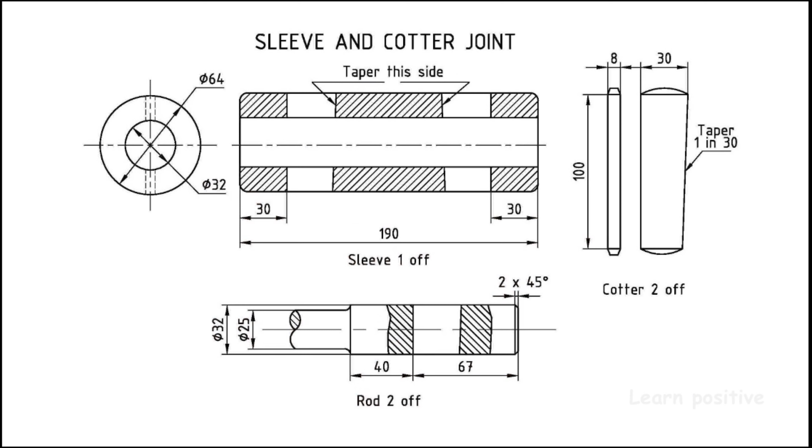Now I am going to show you how the question looks in 3D. The sleeve is shown in brown, and the rod in sandal color. We have to draw two rods, so I show two rods at the left and right, and also two cotters, shown in red at the bottom of the sleeve.

Now we are going to assemble the sleeve, rod and cotter. We insert the rods inside the diameter of the sleeve, and then we insert the cotter from the top and lock the rod so it does not exit from the sleeve. Now I am going to show you the 3D view of the sleeve and cotter assembly.

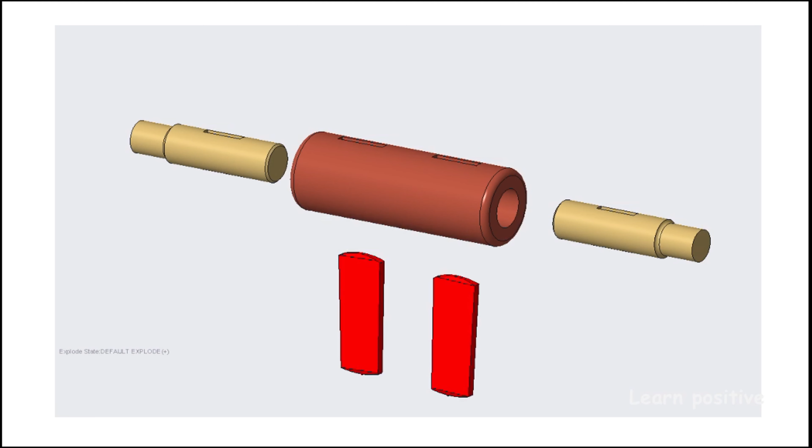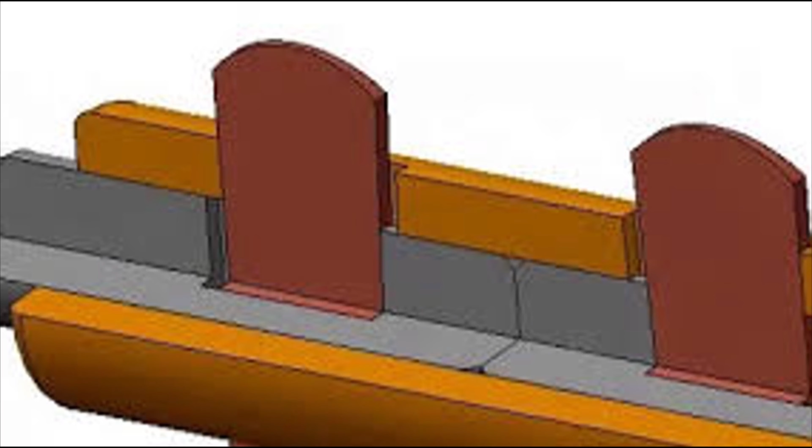In this we have the inside detail of the diagram. You can see the gap between the cotter and the sleeve at the right side, and the gap between the rod and the cotter on the left hand side. Between this zigzag position, the cotter is locked inside the sleeve.

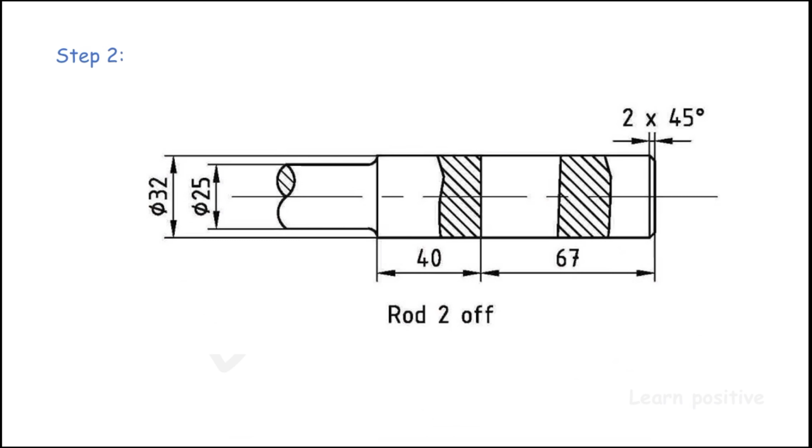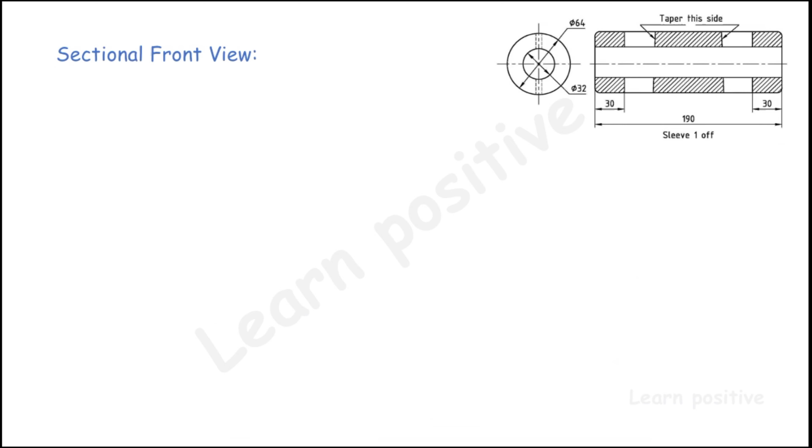Step 1, we have to draw the front view of the sleeve. Step 2, we have to draw the rod portion; we have to draw two rods. Step 3, we have to draw the cotter. I will show each step one by one, and I will also give the dimensioned question at the top of the page.

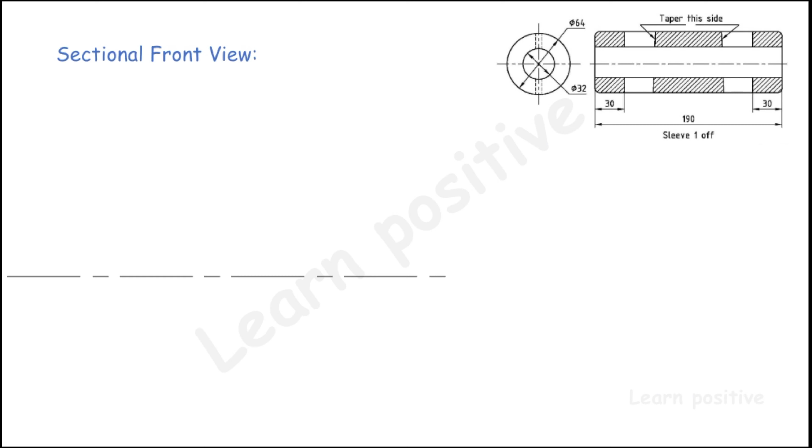So now see this diagram. We have to draw the sleeve. The dimensions of the sleeve are given in the diagram. First I have to draw the center line. One dash is long and another is short; that is the center line. If you draw dashes of the same length, it is the hidden line. Now I am going to draw the center line.

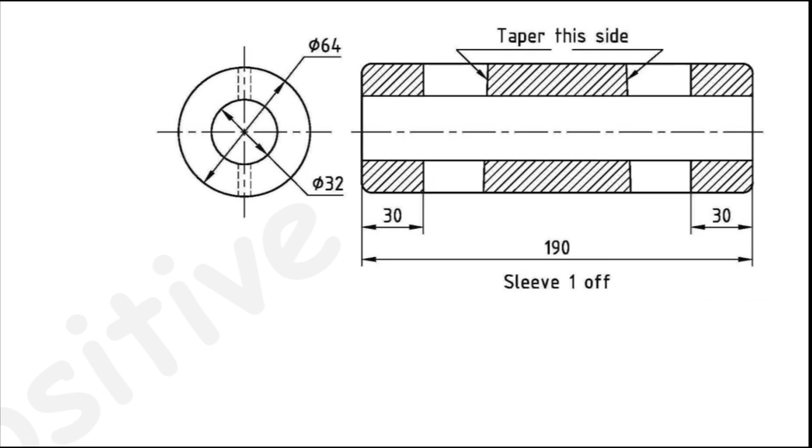Now see the dimensions. The overall length of the sleeve is 190 and the diameter is 64. I take half of the length to mark the sleeve. Half of 190 is 95. So I mark 95 from the center to the left and 95 to the right, and from the left I draw the 64 mm diameter, 32 at the top and 32 at the bottom. So I draw the 64.

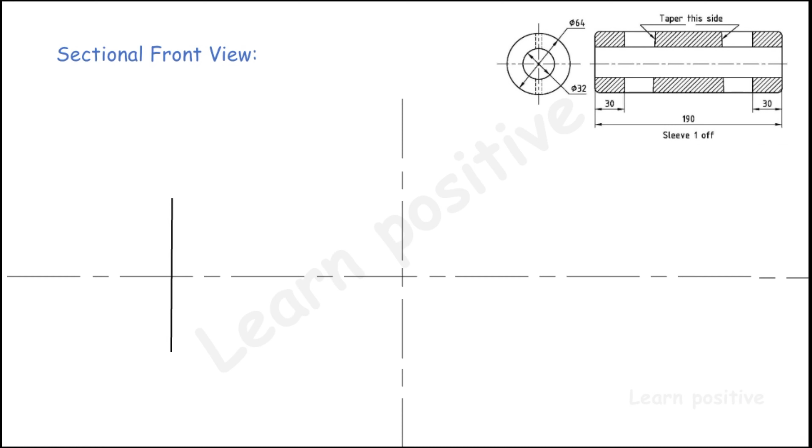Now I am going to draw the length of the sleeve. It is 190, and again the 64 mm diameter, and now I close the sleeve with the 190 mm length.

See, now we have completed the outer side of the sleeve. Now we are going to complete the inner side. So the inner diameter is 32 mm. So I have to mark the 32 mm at the center. So from the center, left hand side center, I mark half of the 32, that is 16 mm. 16 mm at the top and 16 mm at the bottom.

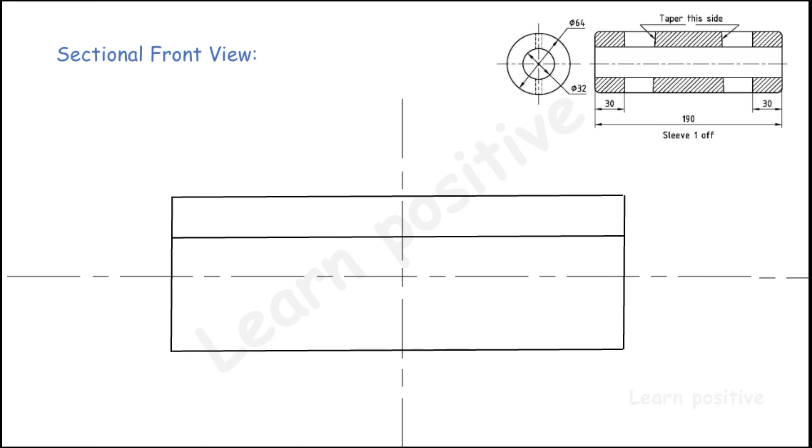Now from the right also I will mark the same 32, 16 mm, and now I am going to assemble the line. So the same way I have to draw the bottom line. So the 32 mm diameter is drawn.

After that I have to draw the cotter portion, the hole for the cotter portion. So from the left it was 30 mm, from the right it was 30 mm. So I have to mark from the left 30 mm and draw the line the same as below, and from the right to left it was 30 mm, same as below.

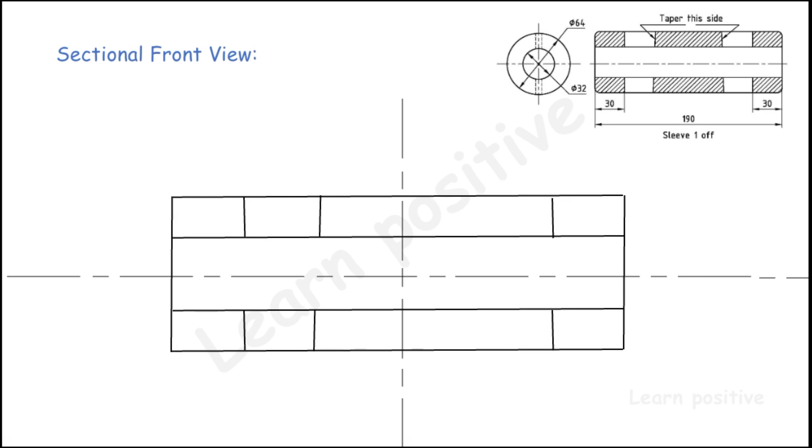And then now the thickness of the cotter is 30 mm. So I will mark 30 mm and at the bottom 30 mm. As I said, we will mirror the same at the right hand side. Now the first step is completed, and then the second step is to draw the rod. So the dimensions of the rod are given at the top, as we have shown.

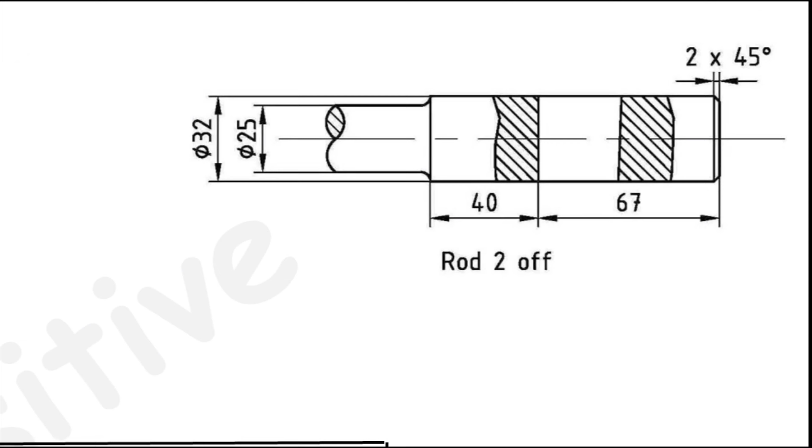Now I am going to draw the rod. First we have to start from the right hand side, so the taper side 2 mm. So from the center I have to give a gap up to 2 mm. So I will draw the 2 mm line, and then the length of the rod is 105 mm, and the bottom also I have drawn 105 mm, and I have closed the rod at 32 mm.

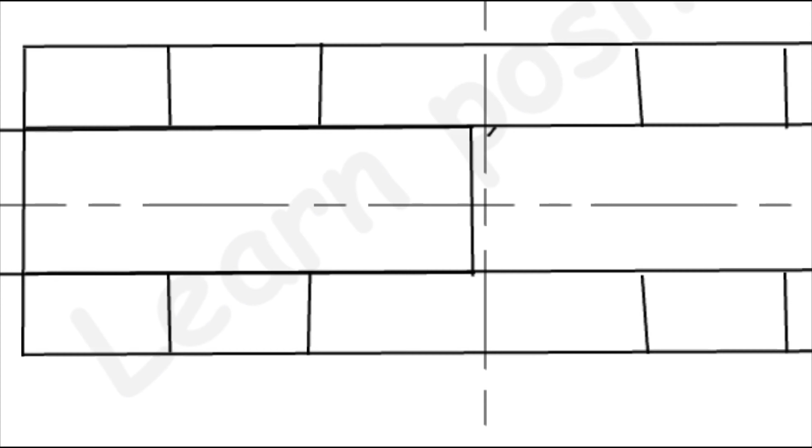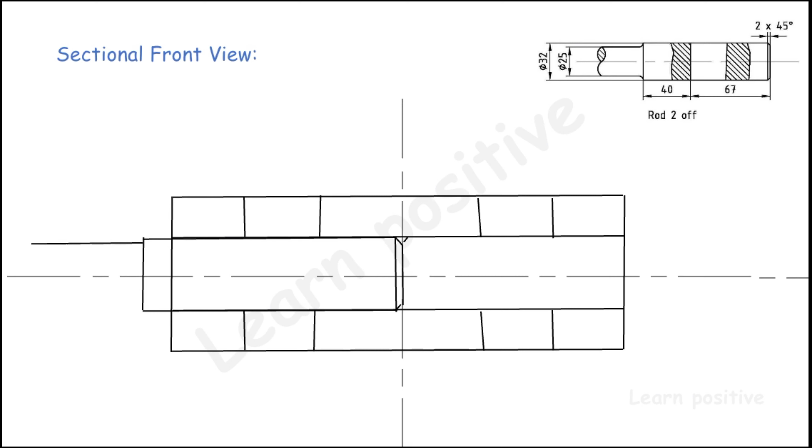And now at the right hand side I will draw 28 mm and close the taper portion at 45 degrees. And then I am going to draw the handle of the rod. So it was 25 mm diameter, so I will mark from the center 12.5 at the top and 12.5 at the bottom, and I draw the line up to 30 mm and close the rod.

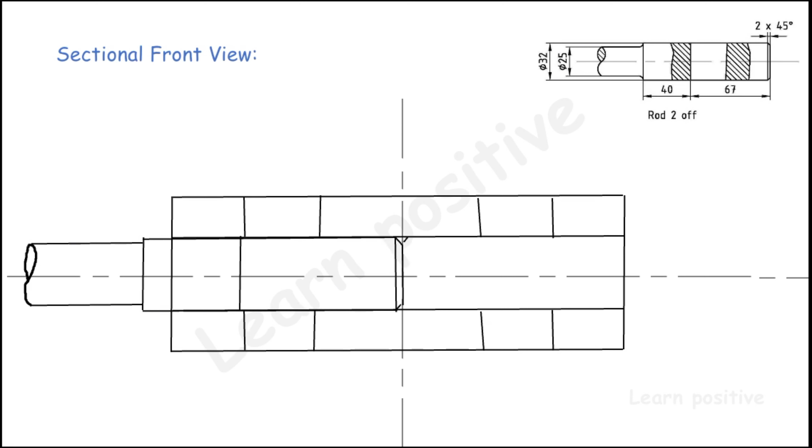And then I have to draw the cotter. So from the left hand side of the rod we have 40 mm, that is the starting portion of the cotter hole. So I will mark 40 mm from left to right, and draw the 40 mm line on the rod. And now the thickness of the cotter hole is 30 mm, so I draw the line up to 30 mm.

Now we are going to mirror the rod; as on the left side, we have to draw on the right side. Now I am going to mirror the rod, the taper portion, and the taper portion was 2 mm thickness, and the line is 105 mm and bottom also 105 mm, and close the drawing, it was 32 mm, and then the 12.5 mm rod. And close the rod.

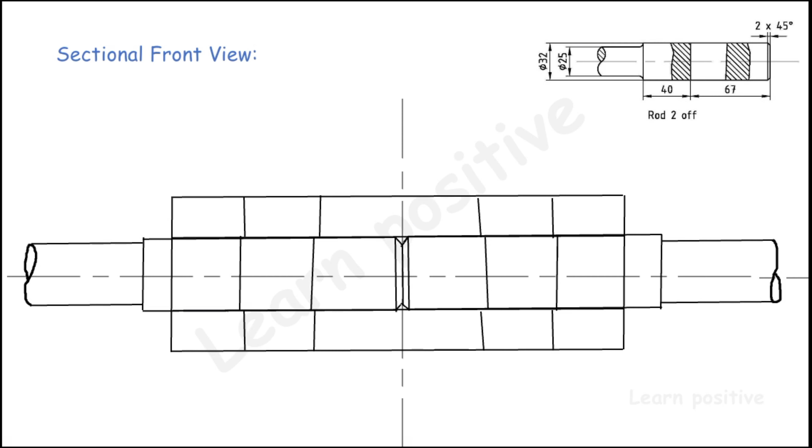As usual, from the right I have marked 40 mm and drawn the line for the cotter hole, and the thickness of the cotter hole is 30 mm. I will draw the 30 mm at the cotter. Now the second step is completed. I have completed the rod, and the third step is we are going to insert the cotter pin.

So for the cotter pin, we have to draw the straight line at the corners of the sleeve, the taper line at the inside of the sleeve. So first I have to start at the corner of the sleeve. So we will take the center line to draw the cotter. So the overall length of the cotter is 100 mm. So I have to mark 50 mm at the top and bottom and draw the line up to 100 mm.

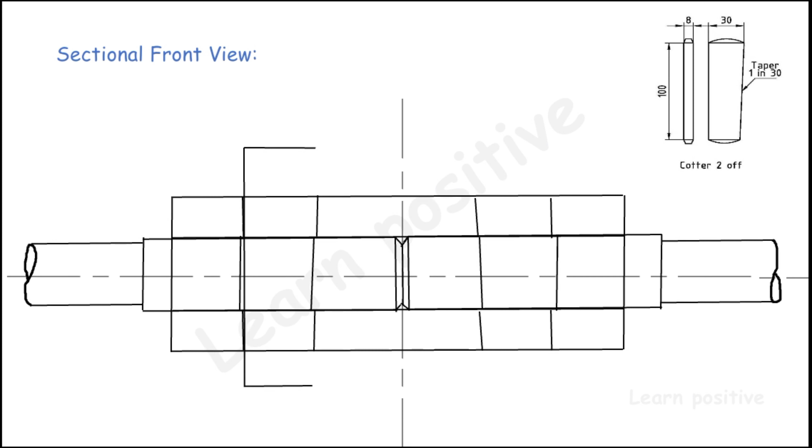So the reference line is taken at the cotter hole, not the rod. So now you can see the gap between the cotter and the rod is given. Now the top portion has length up to 30 mm and the bottom has 27 mm because the taper is 1:30. So now I am going to join the taper, and then I draw the arc at the top and bottom to complete the cotter.

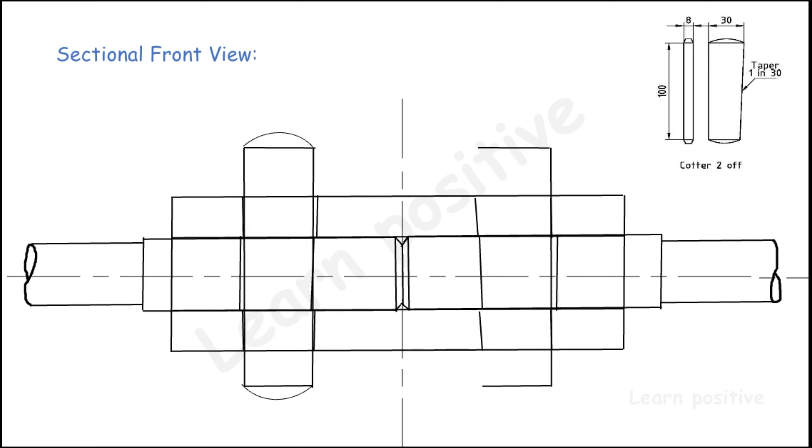As we are going to mirror it from left to right, this will happen. So I have to draw the line 50-50, top 50 and bottom 50 mm. So overall 100 mm height and 30 mm at the top and 27 mm at the bottom, and close the drawing. It was a taper line, and draw the arc at top and bottom. Now the third step is completed.

So this is the full sectional view of the sleeve and cotter joint, and now the second one is the top view. The top view is drawn below the front view. So I have to draw the center line first, and then the line at the center.

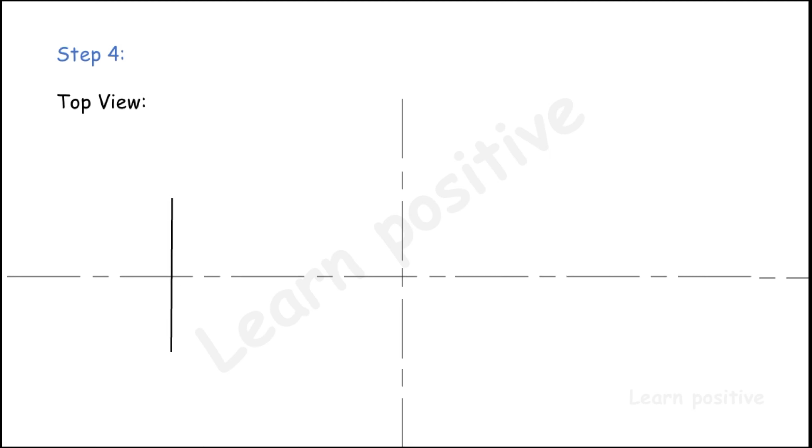As we start before, the sleeve: mark 95 mm from the center to the left and right, and draw 64 mm. So 64 mm, and now draw the length of the sleeve 190 mm, and then top 64 mm, and then 190 mm. The sleeve was closed.

So in the top view we can see the outer portion of the sleeve only, not the inner portion, because it is not a sectional view, it is just a top view. So in the top view we will see the outer portion of the sleeve, and then we can see the rod outside the sleeve. The size of the rod is 107 mm, but the size of the sleeve is 95 mm from the center to the right. So I will subtract 95 mm from 107 mm, and we will get 12 mm. So I will extend the 12 mm rod outside the sleeve.

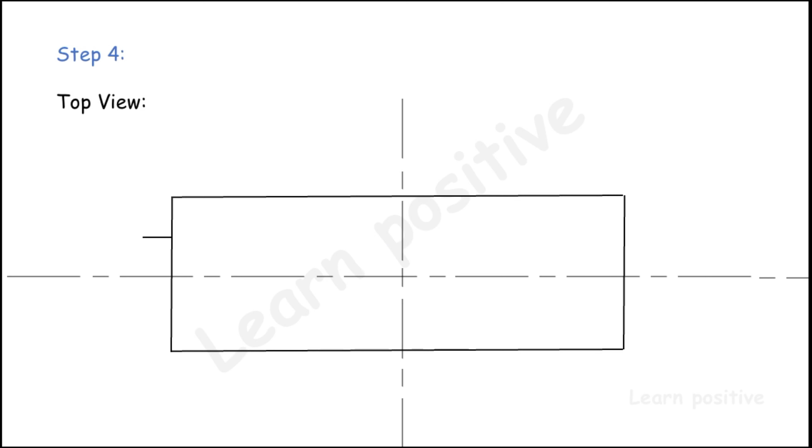So from the center I have to mark 16 mm and draw a 12 mm line and close up to 32 mm, and I am going to draw the handle of the rod. It was 25 mm, so I marked 12.5 and then drew the 25 mm rod and closed it.

As we said before, from the left we have to copy that to the right side also. So we will mark 16 and draw a 12 mm line and close the line up to 32 mm, and now we are going to mark 12.5 from the center and draw the 25 mm drawing and close the drawings. So it was a rod extended outside of the sleeve.

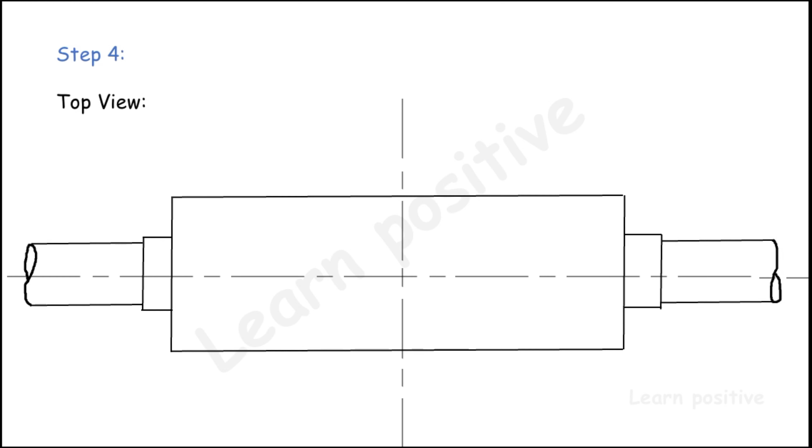Now the cotter was shown at the top, right? So the cotter was drawn from the sleeve's left side. From the left it has a 30 mm starting line. So I will draw the line. The thickness of the cotter is 8 mm. So I will draw the 8 mm and 30 mm lines like a square box. So the cotter is a rectangular box from the top. So 8, 30, 8 and 30, it was closed up, and the same from the right. From the right of the sleeve we have the 30 mm reference and draw the cotter. So this is the top view of the sleeve and cotter joint.

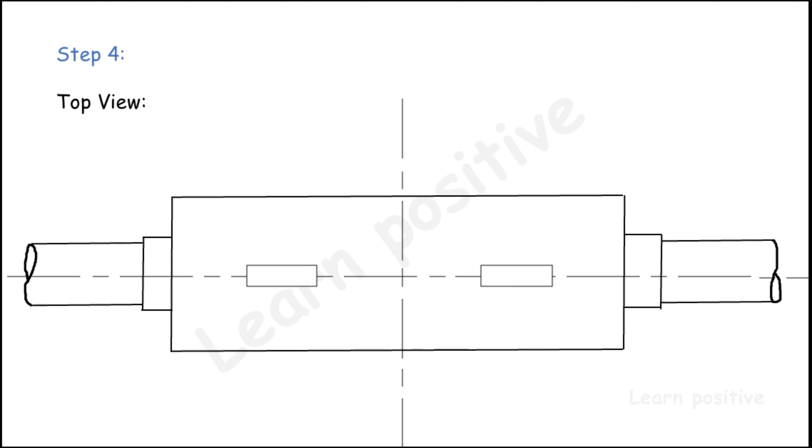Now we are going to see the side view. In drawing we have two types of side views, one is the right hand side view, one is the left hand side view. We have to be clear before we start the drawing. So see the question: if they are asking right side view, draw your side view on the left side. If they are asking left side view, draw the side view on the right side, opposite to the question, because the right side view is drawn on the left side and the left side view is drawn on the right side. So now I am going to draw the left hand side view on the right side of the front view.

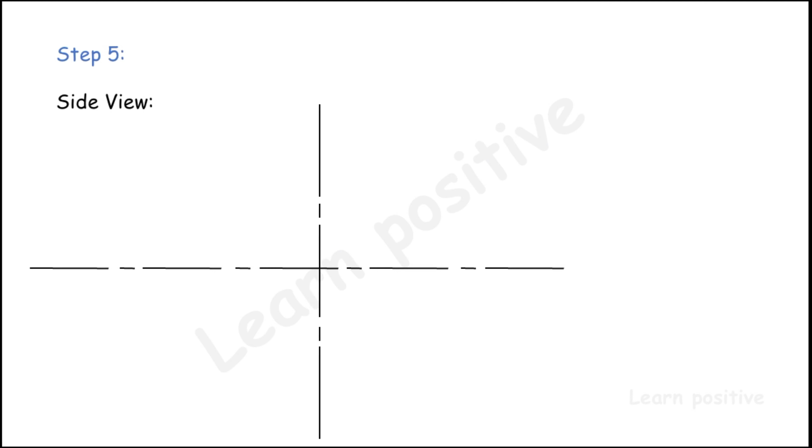So first I have to draw the center line. It's finished. And now from the left hand side I am seeing the assembled view. I will see the outer portion of the sleeve. The outer diameter of the sleeve is 64 mm. I drew the circle 64 mm, and then I can see the inside diameter, the rod diameter is 32 mm. So I draw the 32 mm circle, and then I can see the handle of the rod, it was 25 mm.

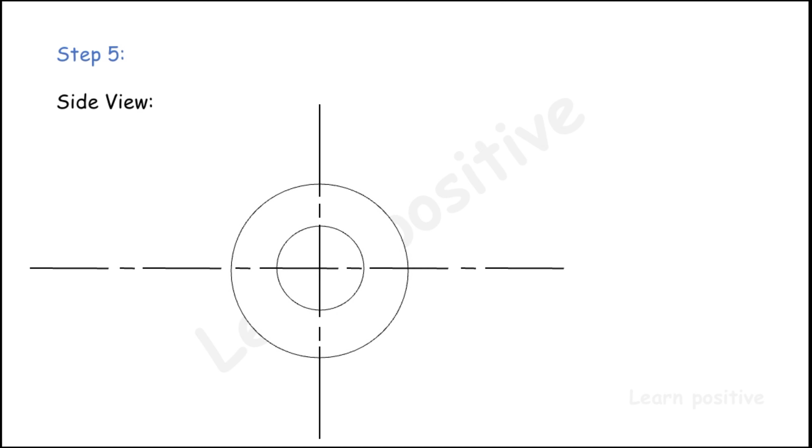So I draw the handle of the rod 25 mm, and then I can see the cotter at the top and bottom, not in the middle. The height of the cotter was 100 mm. So from the center I marked 50 at the top and 50 at the bottom, so the overall length is 100 mm. And now I am going to draw the thickness of the cotter. The thickness of the cotter is 8 mm.

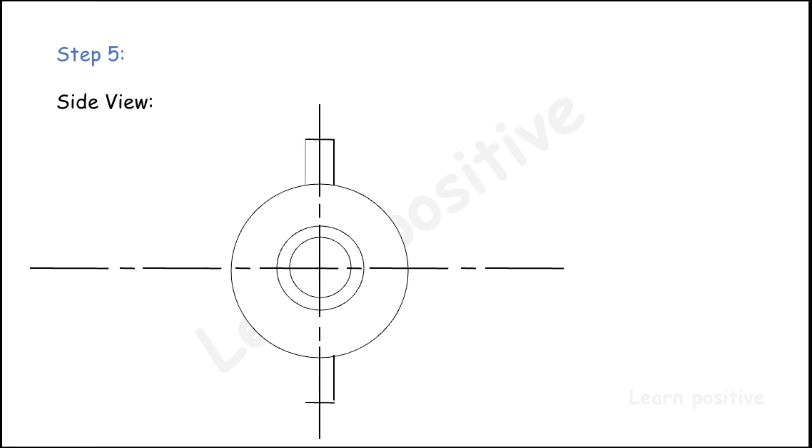So at the bottom of the drawing I am going to start 8 mm, 4 mm from the left and right. So the 8 mm is drawn, and at the top where we marked 100 mm, there also I am going to draw the thickness of the cotter. Now I am going to join this at the center up to the sleeve. So it was joined, the cotter was drawn. So it is the side view of the sleeve and cotter joint.

Now I am going to show you how the cotter was inside the sleeve. It was shown in hidden lines like this. The cotter was inside the sleeve like this, so I will show it with hidden lines. The hidden line was drawn like this. So the side view was completed.